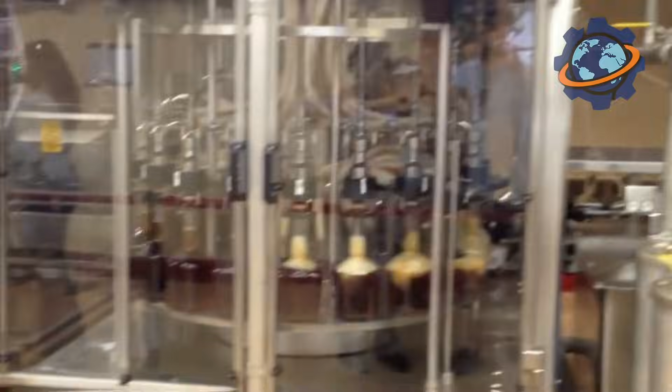In the heart of Kentucky, amidst the smoke, corn, and oak barrels, Maker's Mark has been brewing its potent magic since 1953. 34 million bottles a year, made with respect for the recipe, family, fire, and time. They don't just pour whiskey here, they forge character in every drop, with corn, wheat, smoke, and fire. But how did it all begin 72 years ago? Or perhaps even earlier?

The story of Maker's Mark is about a family that didn't compromise. About how one man and one woman decided enough of making bourbon that just burns in your throat. It's time to make something that has taste, smoothness, and a legend you can't mistake for anything else.

It all started even before Maker's Mark, with the Samuels family, who had been making whiskey since the 1780s. It was a true bourbon dynasty, generation after generation, barrels, recipes, pot stills. But the bourbon they made was like most at the time, strong, woody, harsh, with the aftertaste of a smoky punch. Then, Bill Samuels Sr. came onto the scene, a man with character.

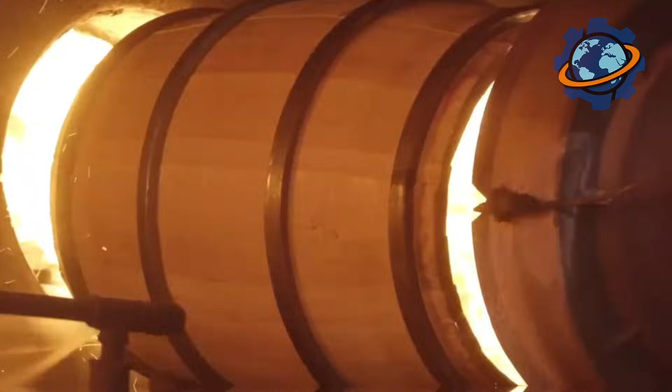In 1953, tired of traditions and the constraints of the old recipe, he took all his whiskey wisdom, acquired over generations, and burned it to hell in a furnace. Yes, he literally burned the old bourbon recipe to start with a clean slate. He needed something new, something different from the competitors. Without the harsh aftertaste of rye, without the sharp finish that hits you in the throat.

And then an idea came. Replace the rye with soft red winter wheat. Less aggression, more roundness, body, warmth. It was revolutionary. While Bill experimented with the grain, Margie Samuels, his wife, held in her hands everything we now recognize as Maker's Mark. She came up with the name. Maker, one who creates. Mark, the craftsman's seal.

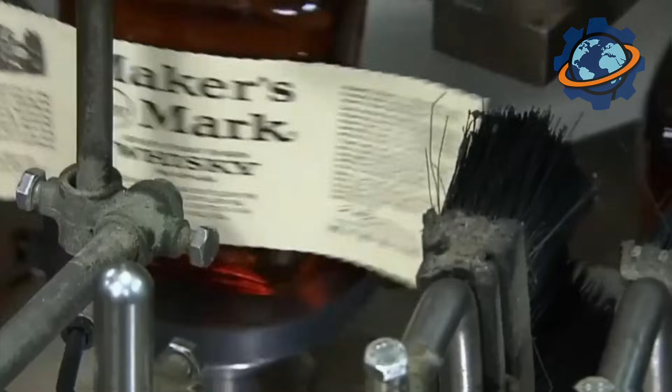She designed the signature label, which she wrote by hand, and decided it should be torn, as if from a workshop. And most importantly, she came up with that very red wax into which the neck of every bottle is dipped by hand. Red, hot, like a sealed kiss. She was a brand architect, marketer, and designer all in one bottle, long before those words became trendy. And Maker's Mark wouldn't be what it is without her.

The distillery was opened in Loretto, Kentucky, where the water is soft and limestone filtered, perfect for bourbon. There, a red watermill still stands as a symbol of moving forward. The bourbon is aged in charred American oak barrels, as it should be, and is not chill filtered to not lose its flavor. The bottles are filled, hand-dipped in red wax, and each one is slightly different. Like a fingerprint.

Maker's Mark wasn't in a hurry to go mainstream. They didn't run TV commercials. They didn't drop the price. They just made bourbon that people wanted to share with a friend. And so, from a small brand on a farm, Maker's Mark grew to 34 million bottles a year. And to this day, at the distillery, you can see that old recipe, not in a book, but in ashes. Bill Samuels destroyed the past to create a bourbon that isn't afraid of the future.

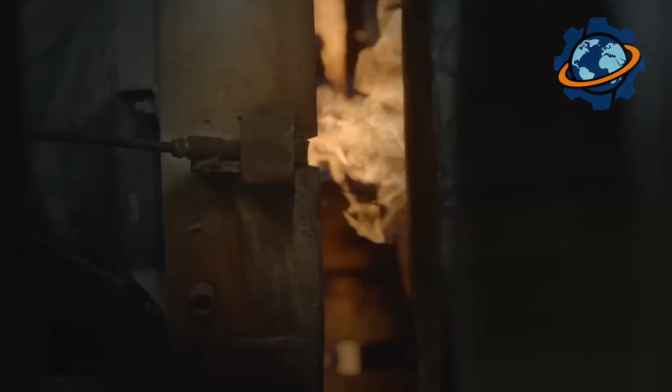If you've ever held a bottle of Maker's Mark in your hands, heavy, with red wax, rough lettering, and a light aroma of smoke, you've touched the very thing that goes through months of fire, fermentation, and wood. This bourbon isn't made on the fly, and is not poured into millions of bottles from a single tank. This is manual labor and old rules. Let's break it down one by one.

The basis of any bourbon is grain. At Maker's Mark, it all starts with the right mix. 70% corn, which gives the body sweetness and weight. 16% soft red winter wheat. Unlike rye, it makes the profile smooth, without a harsh kick to the back of the throat, and 14% malted barley, which kicks off fermentation. No malt, no reaction, no whiskey, nothing to talk about.

All these grains come from American farms, with which Maker's has worked for years, for generations. Each batch is accepted not on faith, but through the laboratory and the nose. Moisture, size, smell. Everything is recorded. There's no "it'll do" here. Everything is under control, as on a shooting range. The grain arrives. It's ground in steel mills to a coarse, hard meal.

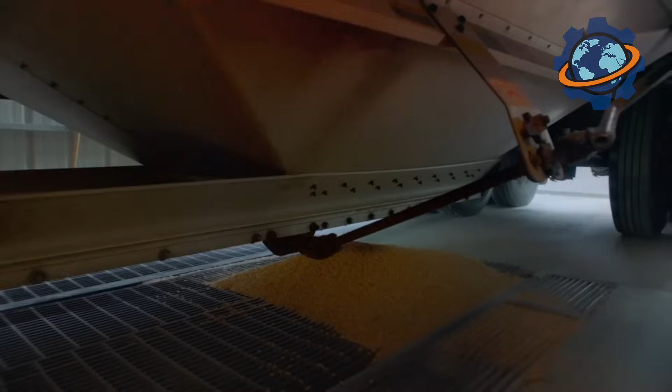Nothing like flour. This is a fighter's mash, ready for the fire. The ground grain is thrown into giant copper tanks. Soft limestone water from the depths of Kentucky is added, and the temperature is raised to 212 degrees Fahrenheit. All this steams, foams, breathes heavily. The mash is born. Starch begins to break down into sugars, which will later become the basis of alcohol.

The air smells heavy, malty, with a hint of hot corn. The heat comes from within, like from a forge. When the mixture cools to the right level, it's pumped into fermentation tanks, and here begins a process that isn't visible from the outside. At Maker's Mark, they use the same yeast that the Samuels family had been keeping since the 1950s. They haven't changed the culture or the method.

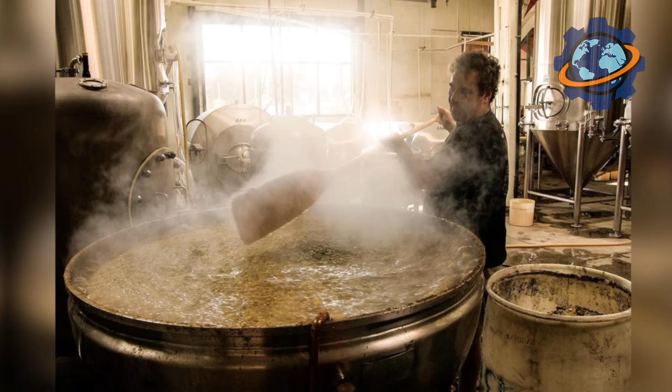Fermentation lasts for several days in oak tanks. It's the oak that provides the microflora, breathes, and works together with the whiskey. Microorganisms chew up the sugar, exhaling alcohol and heat. Everything boils, bubbles, and smells so that your head spins. Ripe bananas, yeasty bread, a little acidity, a little hoppiness. This isn't just fermentation. It's a deep force that carries the mash forward.

Then comes distillation. What separates the truth from the excess? Instead of trendy steel systems, good old copper pot stills, in which the spirit of the whiskey is cut through 2 distillations. The first distillation is rough, cloudy. The low wine has 25% alcohol. The second is clean, shiny. The high wine with a strength of over 130 proof. Here the future bourbon is born.

Rich, oily, powerful. The copper removes sulfur, adds nobility to the body. Not cold, but alive. The whiskey at this stage already has a scent. Not of alcohol, but of what will become a drink. Wood, toasted bread, warmth. The distilled bourbon is still hot, still a bit of a hooligan. It's poured into freshly charred American oak barrels, each one made by hand from white oak. No glued panels, all from solid staves, dried for years in the open air.

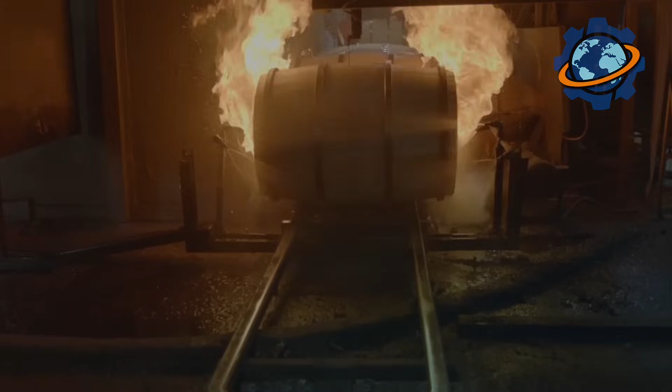Then, fire. The inside of the barrel is burned with flames, not for beauty, but so the inner layers of the wood give the whiskey caramel, vanilla, and that same woody backbone for which it is recognized even blindfolded. Bourbon is poured into the barrel, golden, fragrant, strong, and the long aging begins. How many years? It's not counted in years here, it's counted by taste. On average, 6 to 7 years, but no batch is released until the master says, "This is it."

All this time, the barrel stands in a warehouse where the heat in summer reaches 110 degrees Fahrenheit, and in winter, it can drop to 20. The wood expands and contracts, breathes, presses on the whiskey. Part of the liquid evaporates. The angels share, they say. Up to 10% disappears each year, seeping into the ceiling. But what remains becomes stronger, more complex, deeper. Here the smell of leather, caramel, dampness, and honey appears. The bourbon absorbs everything it needs from the wood, and nothing extra.

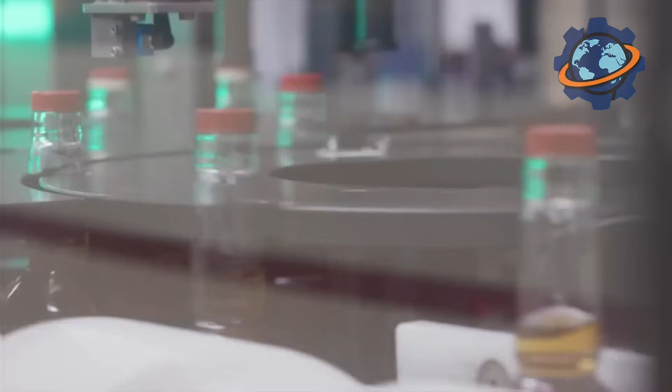And then, the red wax. What you see from afar. What no one imitates. At Maker's Mark, they still dip each bottle by hand into hot red wax. The bottle goes in neck first to the middle, is lifted out, and the wax slowly drips down, leaving a thick, characteristic drop, like a seal. No two are alike. Each one is uniquely wild. And then, and only then, the bourbon goes into boxes, which are sent to bars, stores, and to people who appreciate not just alcohol, but work into which time, tradition, and character have been invested.

The guys in work clothes, with calloused hands, glance at the steam clouds. Everything is going as it should. One pours the yeast, another checks the temperature in the fermenter. In the cooperage, a dry pop explodes. Another oak barrel has been charred inside. Nearby, a woman, focused and calm, dips bottles into hot wax. Her movement is precise. Not a single extra drip.

For lunch, meat with bread, coffee from a thermos, and a short laugh. Did you see how Jim mixed up the barrels yesterday? Then again, barrels, spirit, wood, red wax, and so on, day after day. They don't rush. They're making bourbon.

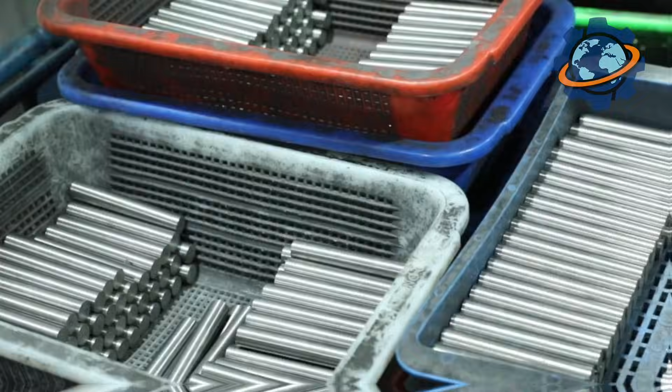Hold a 1-inch tungsten cube. It weighs nearly 1 pound, denser than gold, heavier than lead. Drop it and the floor dents, not the cube. This metal refuses to melt until 6,192 degrees, hotter than Earth's core, beyond temperatures where other metals vaporize.

Light bulb filaments, armor-piercing bullets, rocket nozzles. Tungsten survives conditions that destroy everything else. Yet it starts as dull gray rock, looking worthless. How does brittle ore transform into metal that won't surrender? Why does one nation control 70% of global supply?

Stay with us. You'll witness industrial-scale mining reshaping mountains and discover tungsten's shocking secret. This indestructible metal is so brittle in pure form it shatters like glass.

The Dayu tungsten mine in Jiangxi, China dominates the landscape. An open pit 3 miles across descending 800 feet into earth. Giant haul trucks, each carrying 400 tons, crawl spiral roads looking like toys from the rim's edge.

This single mine produces 40,000 tons of tungsten concentrate annually, enough to manufacture 2 billion light bulbs. 70% of the world's tungsten comes from Chinese operations like this.

Watch the blast sequence. Drillers bore holes 50 feet deep in geometric patterns across the pit floor. Each hole gets packed with explosives, 200 pounds per hole, hundreds of holes per blast. The detonation ripples across the face in sequence, fracturing 10,000 tons of rock in 30 seconds.

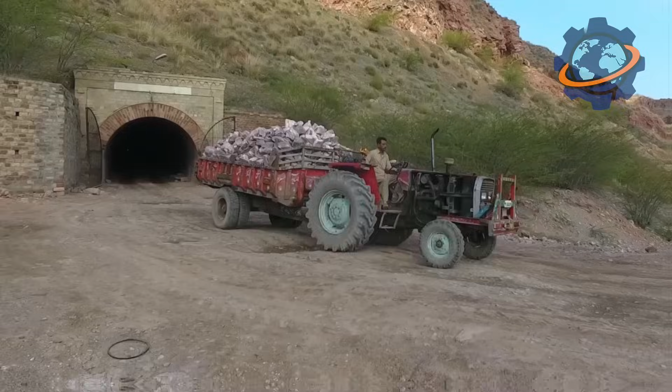Dust clouds billow 300 feet high, visible from orbit. What took nature millions of years to create, humans demolish in half a minute. The ore, wolframite and scheelite, contains just 0.5% tungsten. That means 99.5% is waste requiring removal.

Massive crushers reduce boulders to gravel. Ball mills grind further. Rotating drums containing steel balls pulverize ore to powder finer than flour. The grinding noise is deafening, continuous thunder as metal crushes rock.

Separation uses gravity and magnetism. Wolframite, being dense and magnetic, concentrates easily. Scheelite requires froth flotation. Chemicals make tungsten minerals hydrophobic, clinging to bubbles while waste sinks. The concentrate, now 15% tungsten, ships to processing plants.

China's dominance isn't accidental. They control reserves, processing knowledge, and critically tolerate environmental damage Western nations won't accept. Tailings ponds stretch miles, filled with chemical-laced sludge that'll remain toxic for centuries.

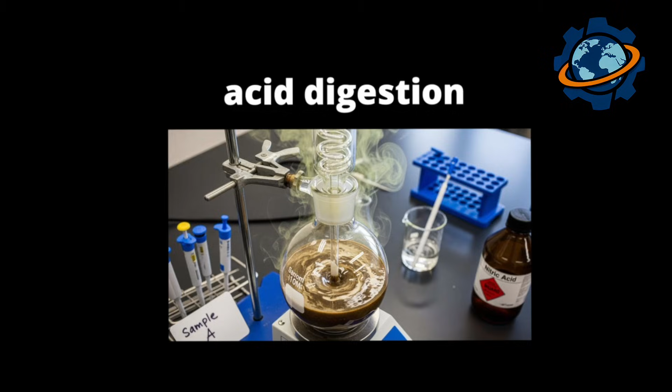Processing concentrate into pure tungsten trioxide requires acid digestion. The concentrate gets dissolved in hydrochloric or nitric acid, a violent chemical attack breaking molecular bonds. Tungsten dissolves while impurities precipitate out. The solution, now containing tungsten compounds, undergoes pH adjustment, causing yellow tungsten trioxide powder to crystallize.

This powder undergoes hydrogen reduction, the crucial transformation. Inside tube furnaces heated to 1,800 degrees, hydrogen gas flows over tungsten trioxide. The hydrogen strips oxygen atoms, leaving metallic tungsten powder.

But here's the challenge. Pure tungsten powder is useless. The particles don't bond. Press them together and they crumble. Tungsten's ultra-high melting point makes conventional melting impossible. No crucible survives the temperatures required. The solution? Powder metallurgy.

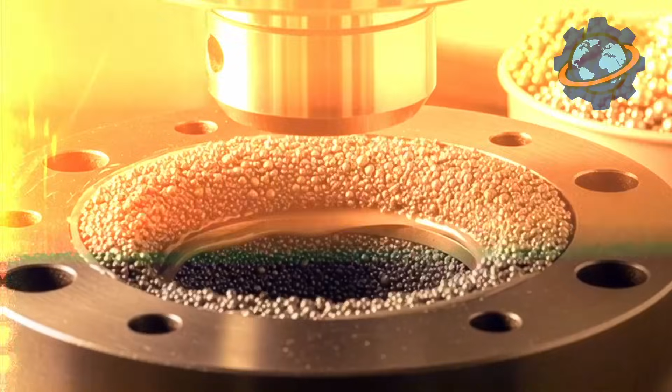Powder metallurgy bypasses melting through sintering. Particles fuse below melting point under pressure and heat. Tungsten powder gets pressed into desired shapes using hydraulic presses generating 50,000 psi. The compacts, called green bodies, are fragile. Handle roughly, and they disintegrate.

The green bodies enter sintering furnaces operating at 4,500 degrees in a hydrogen atmosphere. At these temperatures, tungsten atoms migrate across particle surfaces, welding together without liquefying. The process takes 12 hours. What emerges has transformed. The powder compact becomes solid metal with 99% density.

Dimensional changes are predictable but significant. Parts shrink 18% during sintering. Engineers must design oversized greens compensating for this shrinkage.

Pure tungsten remains problematic. It's brittle at room temperature, difficult to machine. The solution? Alloying. Adding 2% thorium or lanthanum dramatically improves workability. These elements prevent grain growth during sintering, creating a fine-grained structure that machines more easily.

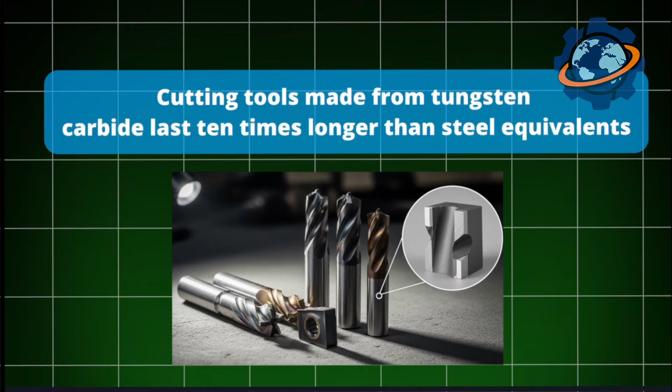The most common tungsten product worldwide is tungsten carbide, tungsten powder mixed with carbon, sintered together. Tungsten carbide achieves hardness second only to diamond. Cutting tools made from tungsten carbide last 10 times longer than steel equivalents. Mining drill bits, machining inserts, industrial dies. Anywhere extreme wear occurs, tungsten carbide dominates.

The material cuts steel like butter but shatters under impact. Drop a tungsten carbide block on concrete and it explodes into fragments. The combination of extreme hardness and extreme brittleness defines tungsten's paradox.

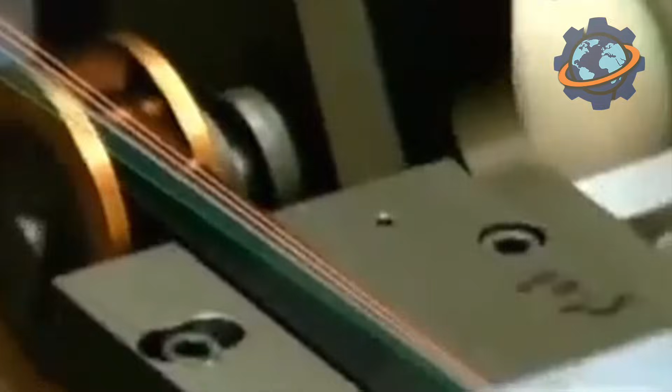Wire drawing demonstrates tungsten's remarkable properties. The sintered tungsten gets heated to 3,000 degrees and drawn through progressively smaller diamond dies. The wire diameter reduces from 1/4 inch to thousandths of an inch, thinner than human hair, for light bulb filaments. This drawing process work hardens tungsten, increasing strength.

Modern LED lights made tungsten obsolete for household illumination, but specialty applications remain. Electron microscopes, X-ray tubes, high-temperature furnace elements. Anywhere electricity must flow through extreme heat, tungsten wire delivers.

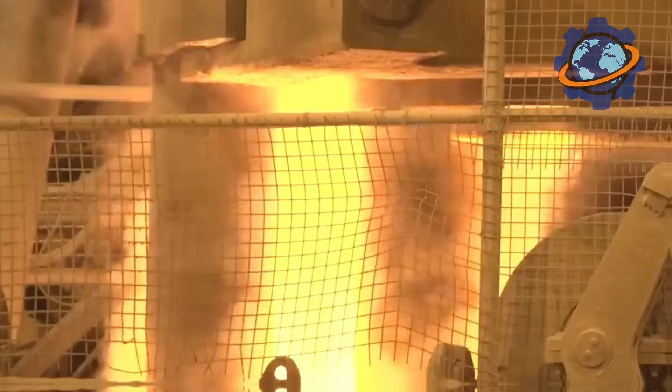Military applications drive demand relentlessly. Tungsten's density, 19.3 grams per cubic centimeter, nearly identical to gold, makes it ideal for kinetic penetrators. Armor-piercing ammunition uses tungsten or tungsten alloy cores. Fired from tank cannons at 5,000 feet per second, these projectiles punch through steel armor through sheer mass and velocity, not explosive force.

The ethical controversy is intense. Depleted uranium performs similarly but raises radioactivity concerns. Tungsten offers equivalent performance without radiation, but mining's environmental cost is staggering. Each ton of tungsten requires processing 200 tons of ore, generating mountains of toxic waste. The metal that survives Earth's most extreme conditions is extracted through processes poisoning the planet.

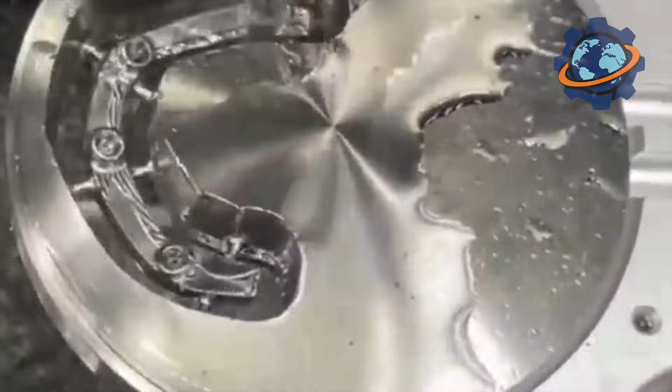Swedish chemist Carl Scheele identified tungsten oxide in 1781, studying the mineral scheelite. Spanish brothers Juan and Fausto Elhuyar isolated metallic tungsten 2 years later. The name derives from Swedish tungsten, heavy stone. For a century, tungsten remained a laboratory curiosity. Everything changed when Thomas Edison needed light bulb filaments in 1879. He initially used carbon, which burned out quickly. By 1904, manufacturers switched to tungsten, revolutionizing electric lighting.

World War I revealed tungsten's military value. High-speed steel cutting tools containing tungsten enabled mass production of weapons. Today's annual production exceeds 90,000 tons, with China dominating supply chains so completely that Western nations consider tungsten a strategic vulnerability. Carbon emissions remain problematic as tungsten production generates 8 tons of CO2 per ton of metal, primarily from energy-intensive processing. Recycling exists but remains limited. Only 30% of tungsten gets recycled, far below rates for aluminum or steel.

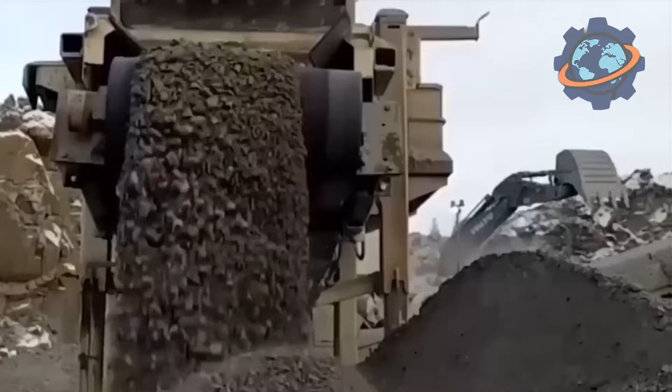Here's the secret we promised. Tungsten's incredible strength comes from its weakness. Pure tungsten is brittle, shattering easily. But that brittleness stems from its crystal structure. Atoms packed so tightly that dislocation movement, the mechanism allowing metals to deform, essentially stops. This atomic rigidity creates the highest melting point, extreme hardness, and resistance to deformation. The metal survives temperatures melting steel because its atoms simply refuse to move. Adding trace elements creates enough flexibility for workability while maintaining strength.

From Chinese mountains to cutting edges worldwide, the transformation completes. We've mastered metal that defies conventional metallurgy, processing it through techniques developed when melting proved impossible. That drill bit cutting through rock, that filament glowing white hot, that bullet piercing armor, all share tungsten's fundamental contradiction. The strongest metal is also the most fragile. The element that won't melt is useless without powder metallurgy. We've learned to work with nature's extremes by accepting, not fighting, inherent limitations. Tungsten doesn't compromise. Neither do the engineers who've learned to shape it.

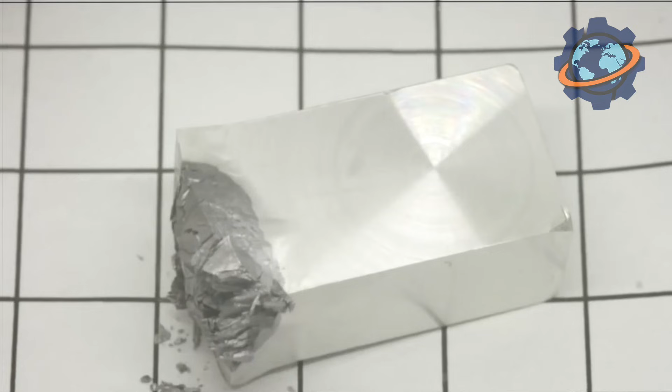Every year, over 40 million new gadgets hit the market, but almost nobody knows about the metal that makes them actually work. Why can a tiny element buried deep underground literally launch an entire civilization, from the Bronze Age to modern electronics? And what do ancient swords, tin cans, and your smartphone have in common? In this video, we're uncovering the secret of tin, the metal that built the past, runs the present, and hides a fact you've definitely never heard before. Stick around until the end. That's where the real mystery reveals itself.

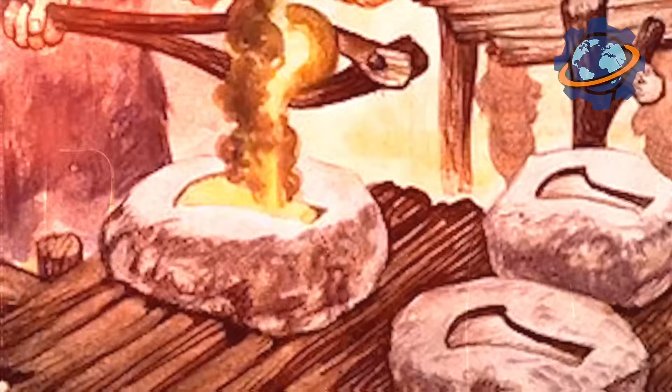Tin isn't just some new trend. This is a metal with a deep-rooted history spanning thousands of years. Its discovery sparked a genuine revolution that forever transformed the course of human civilization, launching what we call the Bronze Age. Picture this. Ancient craftsmen learned to extract copper and forge tools from it. But copper was soft. Then, whether by accident or experimentation, they discovered something remarkable. If you added a little bit of another then unknown metal to molten copper, the alloy became incredibly strong, hard, easier to cast, and held a sharper edge.

That metal was tin. The copper-tin alloy became known as bronze. Bronze swords, shields, tools, jewelry, all of this suddenly became accessible, giving ancient civilizations a massive advantage. It was a true technological leap that transformed warfare, agriculture, and art. Tin became so valuable that real battles were fought over its deposits, and trade routes to tin mines, like those in Cornwall, Britain, were incredibly important.

Over the centuries, tin stayed valuable. It was used as a coating for other metals to protect them from corrosion. For example, tin plate, a thin sheet of steel coated with tin, which was used to make cans. It was also used to make soft solders that joined metals together, and in the production of mirrors, and even to create organ pipes and coins. But its true renaissance came in the 20th century with the rise of electronics. Over 50% of all global tin consumption goes to this industry.

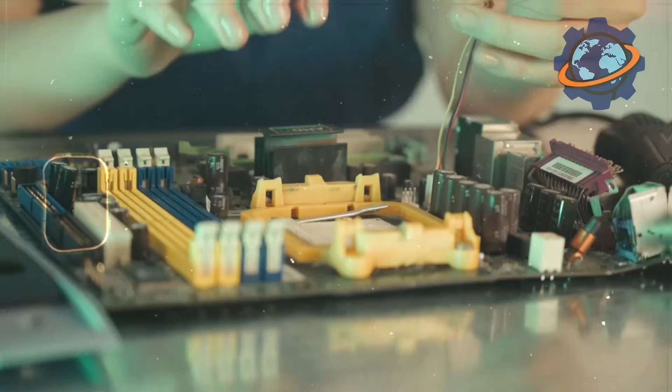Solder. That's its main job. Your computer, smartphone, TV, inside them, thousands of electrical components are connected together. These connections are made using solder, which is usually an alloy of tin with other metals, like lead in the past, now mostly with copper, silver, or nickel. Tin is perfect for solder because it has a relatively low melting point, which makes it easy to melt and form connections without damaging sensitive electronic components.

Tin also wets metals, meaning it easily flows across the surface, creating a strong electrical and mechanical bond. It's got great electrical conductivity too, and it's corrosion resistant. Modern electronics use what's called lead-free solder, which is a huge step forward for the environment. Tin is the main component in these alloys. Without reliable soldered connections, the entire complex architecture of microchips would simply fall apart, and your gadget would turn into a pile of useless parts.

Tin is used to coat other metals, especially copper, on printed circuit boards. This protects the copper traces from oxidation and makes the soldering process easier. It's also used to coat connectors, which improves their electrical conductivity and corrosion resistance.

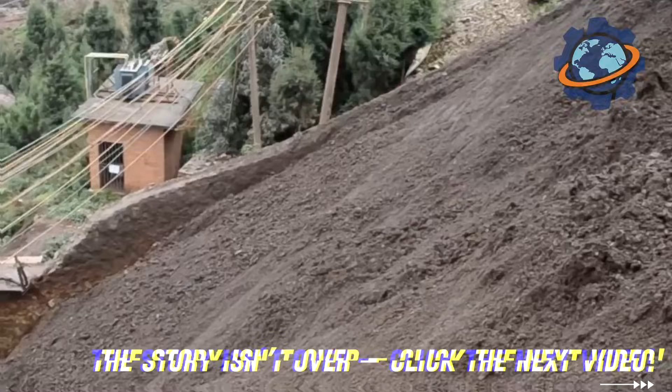Tin isn't a super common element in the Earth's crust. Its primary mineral is cassiterite, basically tin oxide. It's a pretty dense mineral that's often found in placer deposits, meaning you can extract it from river sediments or ancient coastlines. Over 70% of the world's tin production is concentrated in 4 countries across Southeast Asia and South America: China, Indonesia, Myanmar, and Peru. This makes the tin market highly sensitive to political and economic events in these regions.

Tin mining begins with the exploration phase. Geologists, armed with modern technology, conduct surveys, drilling, and analysis of soil and rock samples to find locations where cassiterite concentrations are high enough for economically viable extraction. Once a deposit is identified, development begins, which can follow two main paths depending on the type of deposit.

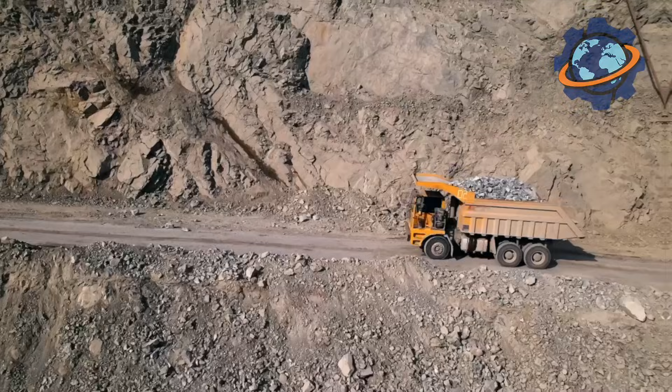The first and most common method of tin mining is from placer deposits. Picture this. Over millions of years, cassiterite washed from bedrock by water and erosion accumulated in riverbeds, at the bottom of lakes, or on ancient seashores. It settled like sand in what's called placer deposits. Extracting from these deposits is often way simpler than digging underground mines.

Here, they use massive dredges, floating factories that scoop up tons of soil and gravel from the bottom of waterways, or they deploy hydraulic monitors, powerful jets of water under high pressure that blast away soil from riverbanks or hillsides containing cassiterite. The blasted rock then flows to primary processing, where gravity methods, exploiting density differences, separate the cassiterite from lighter waste rock. Think industrial-scale gold panning, only gigantic.

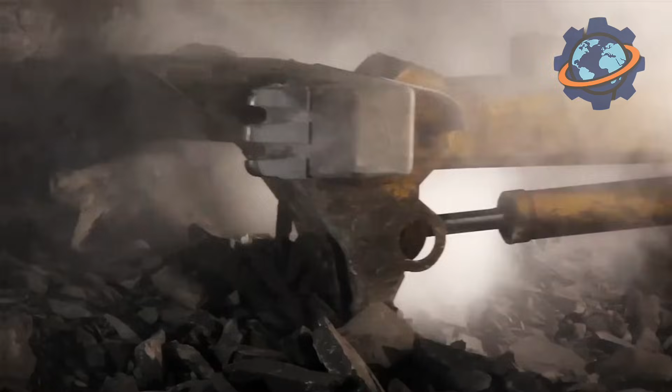The second method? Extracting from primary deposits, where cassiterite sits directly in solid rock. That's where traditional underground mines come in, same as mining any other metal. Miners drill tunnels and boreholes into the rock, use explosives to blast apart the ore vein, then loaders collect the ore and haul it to the surface. It's a more expensive and complex operation, requiring heavy-duty equipment and strict safety protocols.

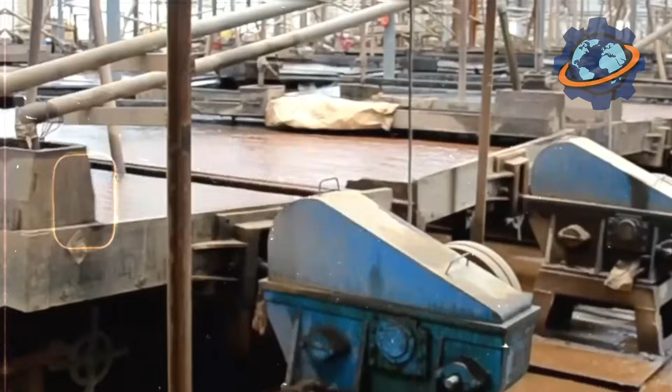Once extracted, the ore, no matter where it came from, heads to a processing plant. First, it's crushed and ground into a very fine powder in mills to free the cassiterite crystals from the surrounding rock. Then various enrichment methods kick in. The first method, gravity separation. Since cassiterite is a pretty dense mineral, it gets separated from lighter minerals using water. This can happen in jigs, concentration tables, or spiral separators.

The second method is flotation. Sometimes, for further enrichment or to separate cassiterite from other minerals, flotation is used, where cassiterite selectively sticks to air bubbles and rises to the surface as foam. As a result of all these processes, a tin concentrate is obtained that already contains more than 50% cassiterite, or even more. This concentrate then goes to a metallurgical plant to produce pure metallic tin.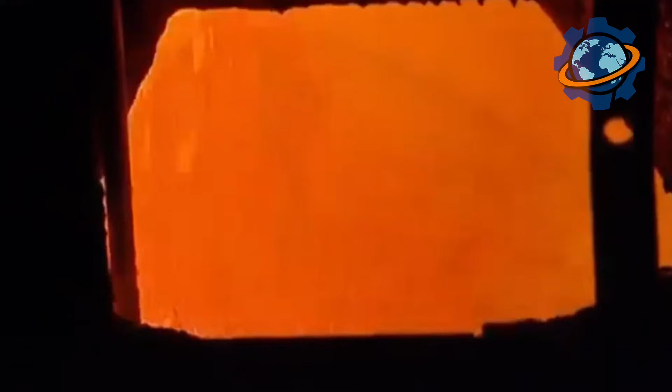Here, the concentrate, which is tin oxide, is mixed with coal, which acts as a reducing agent, and fluxes. Fluxes are substances that help separate impurities. This mixture is heated in special furnaces to high temperatures, typically around 2400 degrees Fahrenheit. At these temperatures, the carbon steals the oxygen from the tin oxide, releasing pure metallic tin, which melts and flows to the bottom of the furnace.

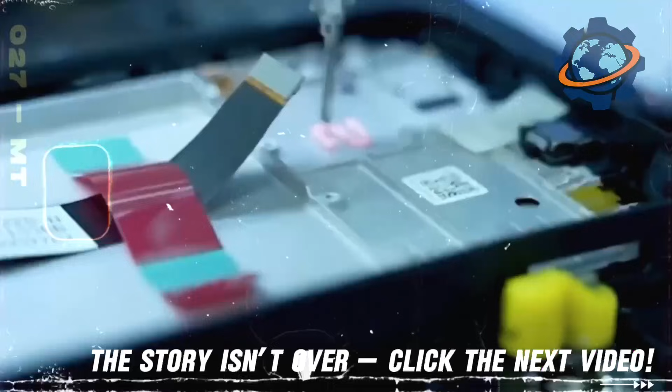The molten crude tin still contains impurities from other metals, so it goes through another crucial stage, refining. This can be thermopurification, where the tin is heated to specific temperatures so other metals separate out or float to the surface. Or more often, electrolytic refining, which allows for extremely high tin purity. High purity means almost 100% in this case. Can you believe that? This is critically important, especially for the electronics industry, where even the tiniest impurities can affect conductivity and component reliability.

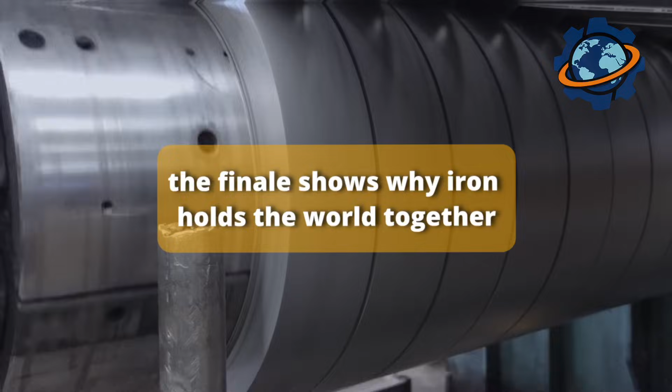How do fiery rivers of molten metal at 3,600 degrees emerge from red ore in city-sized quarries? You'll see explosions in quarries, blast furnaces as tall as 30-story buildings, converters where oxygen turns pig iron into steel in minutes, and rolling mills where 1,000-ton slabs get rolled into paper-thin sheets. Watch to the end. The finale shows why iron holds the world together. This is the story of the metal that built civilization.

The Lebedinsky Quarry in Russia is one of the planet's largest iron ore quarries. Depth, nearly 2,000 feet. Width, 3 miles. From the edge, you can't see the bottom. A gigantic wound in the earth from which 100,000 tons of iron ore are extracted daily. Excavators as tall as 10-story buildings scoop rock with buckets holding 1,800 cubic feet. One bucket is like a small house. Dump trucks with 360-ton capacity haul ore up the spiral road. Wheels taller than a person.

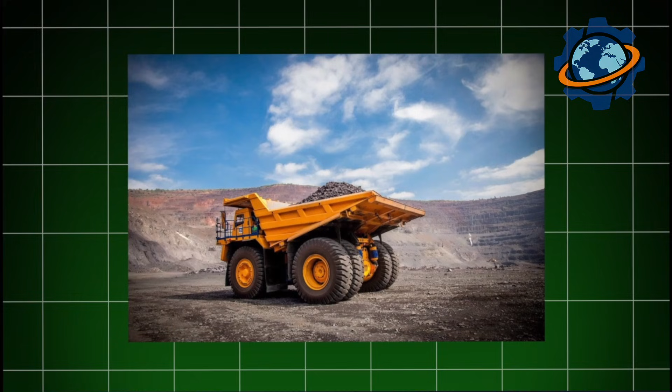But before loading the ore, it needs to be blasted. Drilling rigs create holes 65 feet deep. Tons of ammonium nitrate explosive are packed into these holes. The explosion? Earth trembles. A wall of rock tall as a skyscraper crashes down. A dust cloud rises 3,000 feet. After the dust settles, excavators begin work. The ore is reddish-brown, sometimes almost black. Magnetite and hematite, iron oxides. Iron content ranges from 30 to 60%. The rest is waste rock.

The ore goes to a processing plant. Massive cone crushers grind bus-sized chunks. The noise can be heard for miles. Ore gets crushed to fist size, then to gravel, then smaller. It enters ball mills, steel drums 20 feet in diameter, 33 feet long. Inside are hundreds of tons of steel balls. The drum rotates, balls drop, grinding ore into fine powder. After 8 hours of grinding, you get reddish-brown dust. It's mixed with water, creating pulp, liquid slurry.

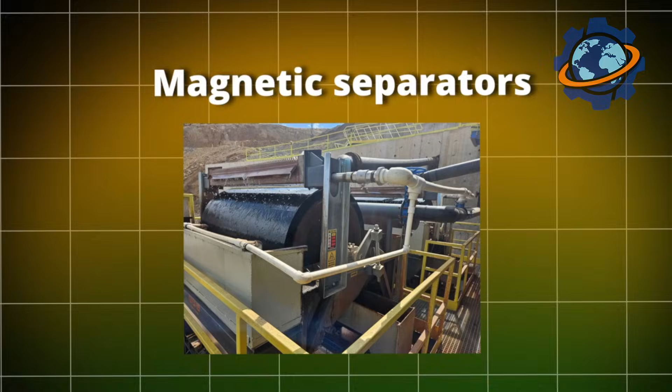This slurry passes through magnetic separators. Magnetite sticks to magnetic drums. Waste rock washes away. The concentrate contains 65 to 70% iron. From this, they make pellets, granules the size of walnuts. Wet concentrate gets rolled into balls on special drums, then fired at 2,400 degrees Fahrenheit. Pellets harden, becoming rock solid. These pellets are raw material for blast furnaces. Each plant produces millions of tons of pellets yearly. They're loaded onto trains and shipped to steel mills.

A blast furnace is a steel tower 330 feet tall, 46 feet in diameter. 30 stories of pure metal and fire. Lined inside with 3-foot-thick fireproof brick. Internal volume, 176,000 cubic feet. Iron ore pellets, coke, and fluxes like limestone or dolomite are loaded from the top, in layers, like a layered cake, several hundred tons at a time. From below, through tuyères, openings in the walls, hot air is blown in. Air temperature, 2,200 degrees Fahrenheit. Pressure, 4 atmospheres. Coke ignites. Temperature in the furnace's lower section reaches 3,600 degrees Fahrenheit.

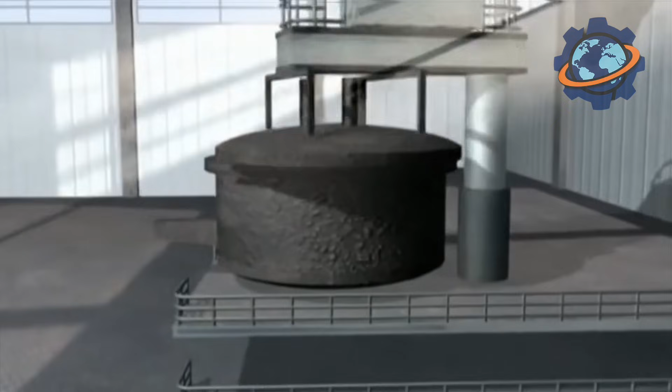Pellets slowly descend, heating up. Different reactions occur at different heights. First, moisture leaves the ore. Then, at 930 degrees, iron oxide reduction begins. Carbon from coke strips away oxygen. At 1,800 degrees, ore becomes spongy iron. At 2,700 degrees, iron melts. Drops of molten metal flow down. At the furnace bottom, molten pig iron accumulates, an iron alloy with 4% carbon. Pig iron temperature at the furnace bottom is 2,700 degrees Fahrenheit. It glows blindingly white with an orange tint. Pig iron is denser than slag, so it stays at the bottom. Slag, molten impurities and fluxes, floats on top.

Every 4 hours, they open the tap hole, an opening in the furnace's sidewall. Pig iron tapping is a fire show. A stream of molten metal flows down channels. Sparks fly dozens of feet. The brightness requires dark glasses to watch. Pig iron flows into massive ladles on railroad cars. One ladle holds 300 tons. It's a locomotive made of molten metal. The ladle gets covered to prevent cooling and shipped to the steelmaking shop. One blast furnace operates continuously for years. Stopping is catastrophic. Metal would solidify inside. The furnace produces 10,000 tons of pig iron daily. That's like 100 railroad cars.

Major steel mills have 10 to 15 blast furnaces. But pig iron isn't steel yet. It's brittle due to high carbon content. Steel is needed, an alloy with less than 2% carbon.

Pig iron gets poured into a converter, a massive pear-shaped vessel 33 feet tall, lined with fireproof brick. It holds 350 tons of molten metal. The converter tilts, pig iron pours in, steel scrap is added for cooling. The converter returns to vertical position. An oxygen lance, a tube 20 inches in diameter, lowers from above.

Oxygen flow begins. A jet of pure oxygen at 150 pounds per square inch pressure strikes the molten metal. Violent reaction begins. Oxygen oxidizes carbon, silicon, manganese, impurities in pig iron. These exothermic reactions release enormous heat. Temperature rockets to 3,200 degrees Fahrenheit.

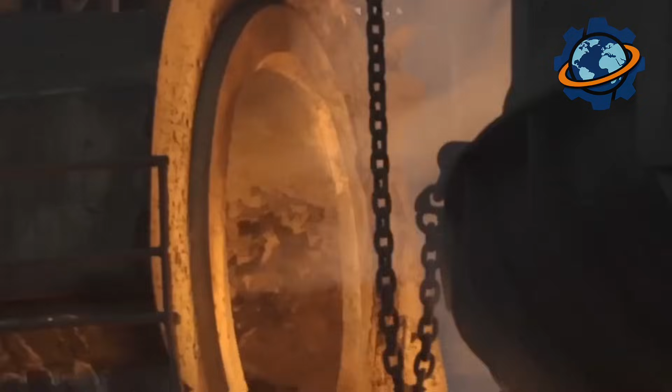Metal boils and churns. Flame tongues several feet high shoot from the converter mouth. Sparks and molten drops fly everywhere. The blowing process takes 20 minutes. In this time, 350 tons of pig iron become steel. Carbon burns down to 1% or less.

The converter tilts, steel pours into a ladle. The molten metal glows blindingly white at 2,900 degrees Fahrenheit. Alloying elements get added to the ladle: manganese, chromium, nickel, molybdenum, depending on the steel grade needed. They mix it by blowing argon through. Then steel gets cast. There are two methods.

First, continuous casting. Molten metal pours into a crystallizer, a water-cooled copper mold. Below, a solidifying blank emerges, a slab 8 inches thick, 6.5 feet wide. It glows red, surface temperature around 1,800 degrees Fahrenheit. Gas cutters slice the slab into 33-foot lengths. One slab weighs 25 tons.

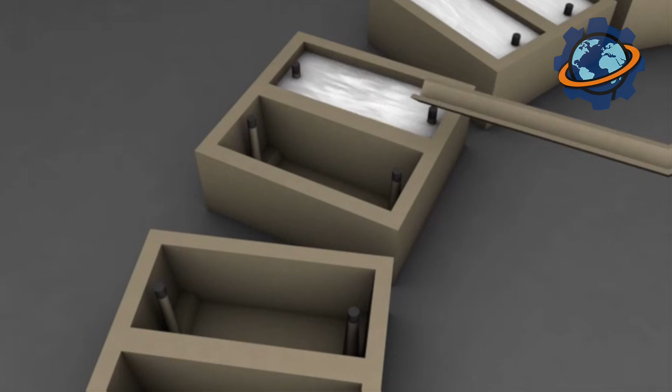Second method, casting into ingot molds. Steel forms. This creates ingots up to 50 tons. These ingots and slabs are semi-finished products. They go to rolling mills. There begins the final transformation, turning thick blanks into thin sheets, rails, or beams.

Slabs heat in reheating furnaces to 2,200 degrees Fahrenheit, red hot. Then they go to the rolling mill. It's a line of dozens of rolls. Steel cylinders 3 feet in diameter weighing dozens of tons. Rolls rotate toward each other. The red-hot slab enters between rolls. They squeeze and roll it. The slab gets thinner and longer.

It passes through the next pair of rolls, even thinner, dozens of times. An 8-inch thick slab becomes a sheet 1 to 2 millimeters thick. Length grows from 33 feet to over half a mile. Rolling speed on finishing mills reaches 50 miles per hour. Red-hot steel ribbon flies through the mill, sparks flying everywhere.

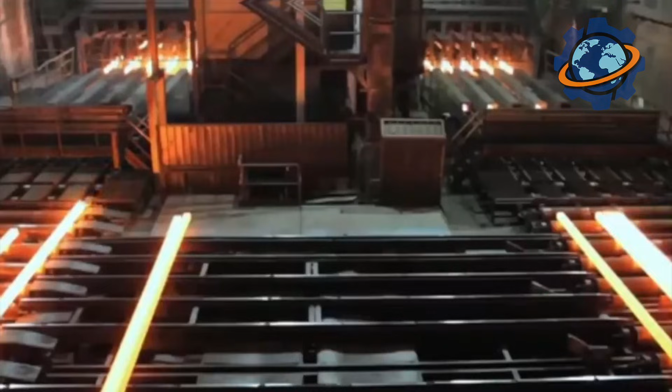Temperature drops to 1,400 degrees Fahrenheit, metal darkens. The strip cools with water, winds into giant coils weighing 20 to 30 tons. This is hot-rolled steel, the foundation for car bodies, appliance housings, building structures.

Global steel production is 2 billion tons yearly. China produces over 1 billion tons, half the world's output. India, Japan, the US, Russia are other major producers. Steel is infrastructure's backbone. 95% of metal structures are steel, from skyscrapers to tin cans, from tankers to paper clips. Iron and steel are civilization's skeleton.

Iron is the oldest metal after copper and bronze. The Iron Age began 3,000 years ago. First, iron came from meteorites, ready-made metal fallen from the sky. Egyptian pharaoh Tutankhamun was buried with a meteorite iron dagger. Smelting iron from ore was learned by Hittites in Asia Minor around 1200 BC. They kept the secret for centuries, but technology spread.

Iron weapons were stronger than bronze. Iron plows worked soil better than wooden ones. Civilizations with iron defeated civilizations without iron. Medieval times, iron was made in small furnaces. The Industrial Revolution began with blast furnace invention in the 18th century. Early furnaces used charcoal. Later, they switched to coke from coal.

The 19th century brought the converter process, rapid pig iron to steel conversion. Bessemer, Martin, Thomas, names that changed the world. The 20th century was steel century. Skyscrapers, bridges, ships, automobiles. Without steel, there'd be no modern world.

And so, traveling from explosions and 2,000-foot-deep quarries through giant crushers and magnetic separators, through 300-foot-tall blast furnaces at 3,600 degrees and converters where oxygen burns out carbon in 20 minutes, through rolling mills where 8-inch slabs become millimeter-thin sheets, steel emerges, the metal that built civilization.

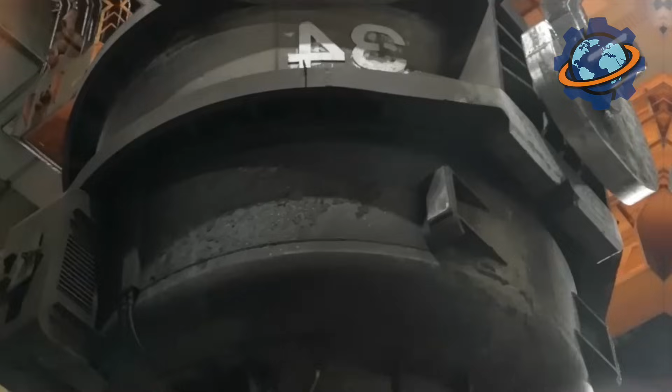And on the surface, iron rules. 95% of all metal is iron and steel. From nails to bridges, from paper clips to skyscrapers, iron holds the world together. Without iron, humanity would collapse back to the Stone Age. No machines, no electricity, no internet.

Everything's built on iron. From fiery rivers of molten pig iron in blast furnaces to steel beams holding up skyscrapers, iron is the foundation, the base, civilization's skeleton. Metal of the gods that became metal of the masses. The most abundant, most important, most irreplaceable. Iron, the metal that holds the planet together.

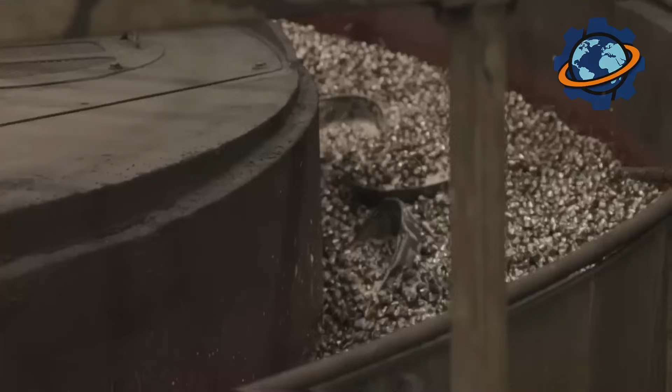Every year, the world melts over 1 billion tons of pig iron. But where does all that fiery metal come from? Imagine a giant furnace as tall as a 35-story skyscraper that never sleeps. Its guts glow like the Earth's core, and the temperature hits 3,600 degrees Fahrenheit. That's 2,000 Celsius. This is a blast furnace.

They don't just melt metal here. They give birth to the heart of industry. But there's a secret that only the guys standing at the tap hole know. If you stick around to the end, you'll find out what's really happening in the center of this burning fortress, and why it changes everything.

Imagine a colossal tower, taller than a 35-story skyscraper. The ground beneath your feet vibrates slightly from its relentless work, and the air is filled with a hum, like the breathing of a giant beast. At night, its top glows, pushing back the darkness. This is a blast furnace, a massive vertical smelter, where 24 hours a day, 7 days a week, the magic of turning ore into metal happens non-stop.

Why blast furnace? The name comes from the process itself, and it's no accident. The whole secret to a blast furnace is the constant blast of incredibly hot air that fuels the fire and kicks off all the necessary reactions. If you were to slice a blast furnace open, you'd see it looks like a stretched out bottle. Every part of it has a name and a purpose. The walls of the furnace are lined with special refractory bricks, capable of withstanding temperatures that would melt solid rock. This is a true fortress, built to tame fire itself.

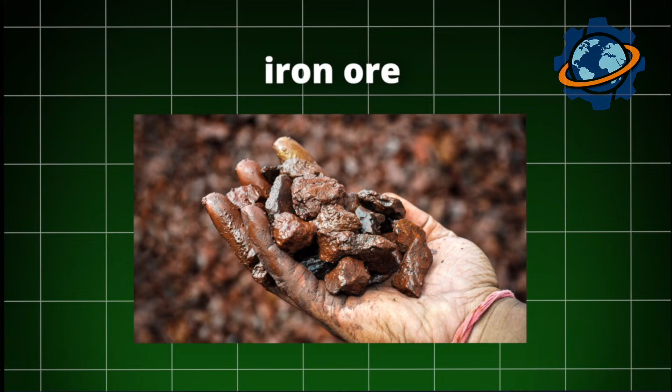The iron ore is the foundation of it all. They usually don't just use raw ore dug from the ground, but specially prepared sinter or pellets. These are baked clumps of fine ore, or rolled balls of ore concentrate. The main goal is to have as much iron oxide in the raw material as possible, from which the oxygen will later be ripped out.

Coke is coal that's been cooked in special ovens without access to air. After this treatment, it becomes strong, porous, and burns with an immense amount of heat. But that's not its only role. The carbon that makes up coke is the real magician that turns ore into metal. The flux is most often ordinary limestone. Why is it needed? The ore and coke always have useless impurities, so-called gangue. The limestone helps to bind these impurities, forming an easily meltable slag.

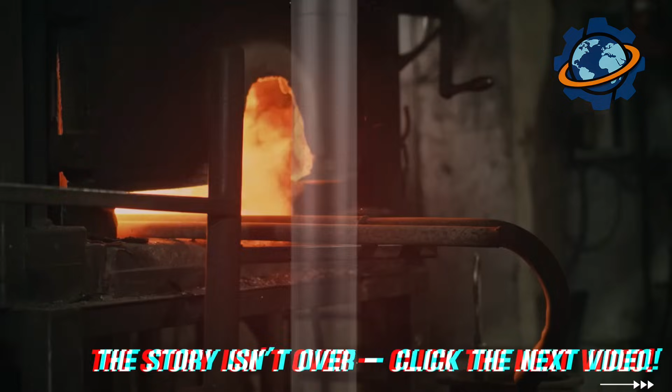So, the charge is loaded. What's next? This is where it gets interesting. Two streams move towards each other. From the top, the layers of the charge slowly descend, and from the bottom, a hurricane of superheated gases rushes up to meet them. It all starts at the bottom, in the hearth. Through special pipes called tuyères, air heated to a scorching 2,200 degrees Fahrenheit, 1,200 Celsius, is blasted into the furnace under huge pressure. That's hotter than volcanic lava.

Meeting the red-hot coke, the oxygen in the air instantly ignites. The temperature in this zone skyrockets to 3,600 degrees Fahrenheit, 2,000 Celsius. This creates carbon dioxide. But as it rises higher and passes through new layers of coke, it turns into another gas, carbon monoxide. And this gas is the real oxygen thief.

As this searing hot stream of gas rises up the furnace shaft, it envelops the chunks of ore and begins to greedily rip the oxygen from them, leaving behind reduced, spongy iron. The reduced iron continues its journey downward into hotter and hotter zones. It passes through the glowing layers of coke and, like a sponge, begins to soak up its carbon. And here's where something amazing happens.

Pure iron melts at a very high temperature of 2,800 degrees, 1,530 Celsius. But soaking up carbon dramatically lowers that melting point. That's why a blast furnace doesn't produce pure iron, but an alloy of iron and carbon, pig iron, which becomes liquid at just 2,200 degrees, 1,200 Celsius. Roughly every 40 to 60 minutes, enough liquid products have collected in the bottom of the furnace. It's time for the climax, a truly mesmerizing sight.

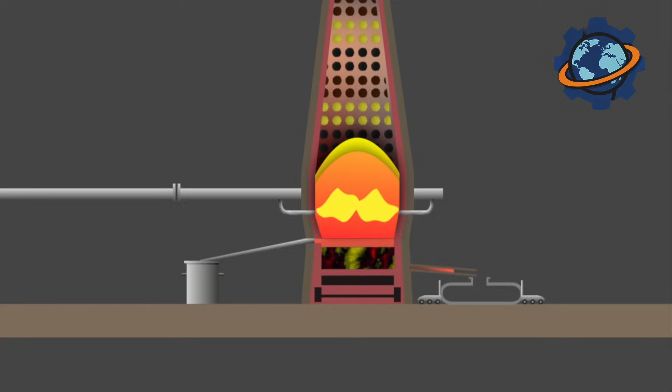The blast furnace slag, which we've already mentioned, becomes a valuable raw material for making cement, building blocks, and road aggregate after it's cooled and crushed. The blast furnace gas that comes out of the furnace isn't just released into the atmosphere. It's cleaned of dust and used as fuel to heat the very same air that's blasted back into the furnace. It's a closed-loop system that makes the process more economical.

Without a doubt, metallurgy is a serious challenge for the environment. However, modern technologies are constantly evolving. When blast furnaces are modernized, powerful filters and cleaning systems are installed to capture dust and harmful gases. Scientists and engineers around the world are working on creating green technologies, like using hydrogen instead of coke, to make metal production cleaner. But for now, the blast furnace remains the king of metallurgy. And every time you see a bridge, a skyscraper, or a train, remember these fiery giants and the people who tame rivers of fire to give the world a strong and reliable foundation.

For 75 years, from the late 19th century to the 1970s, the USA was the undisputed world leader in the production of pig iron, steel, and rolled products. During this period, the American iron and steel industry wasn't just a sector of the economy, it was the key or barometer of the American economy. In the 1920s, for example, the country produced about half of the world's pig iron. Imagine that. Every other ton of this strategic metal in the world was born right here in American furnaces.

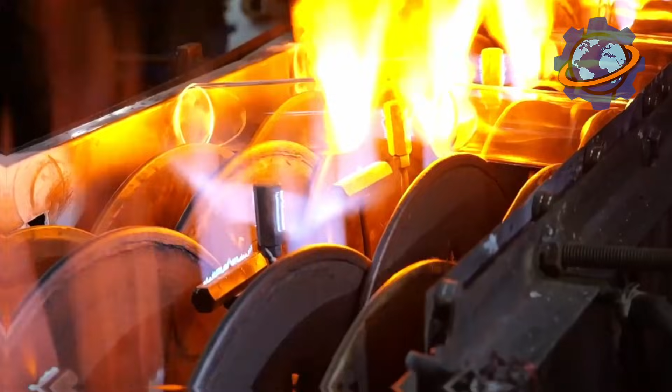Every year, the world produces over 130 million tons of glass. But few people know that behind every clear window, bottle, or skyscraper facade lies a true symphony of fire, air, and light. Imagine a river of molten sand flowing over a mirror of tin, giving birth to perfectly flat sheets of glass so smooth they can reflect the clouds. But there's another kind of glass, one that's alive, with a soul, created by the breath of a craftsman and the fire of a furnace. Stick around to the end, and you'll see how ordinary sand travels through a 3,000-degree journey to become the transparent marvel our world is made of.

While the vast majority of architectural glass today is born from a perfectly flat, fiery river flowing over molten tin in the float process, the true soul of the material is revealed in the methods that give it character and uniqueness. This journey from a simple, transparent sheet to a work of decorative art is a fascinating one.

To create glass with individuality that carries the mark of a human touch, craftsmen still turn to techniques that have existed for centuries. A glassblower dips his long, hollow pipe into a furnace where a mass of sand and other minerals boils at 2,000 degrees Fahrenheit. He gathers a honey-like ball of glowing glass on the end of the pipe and, skillfully rotating it, begins to blow air into it. The initial bubble, born from his breath, gradually transforms into an elongated, shining hollow cylinder.

Thanks to the force of gravity and skillful swinging, this cylinder can reach several feet in length. After the ends of the cylinder are cut off, it's sliced lengthwise and placed back in the furnace. There, under the heat, it slowly unrolls like a scroll, and the craftsmen smooth it into a flat sheet.

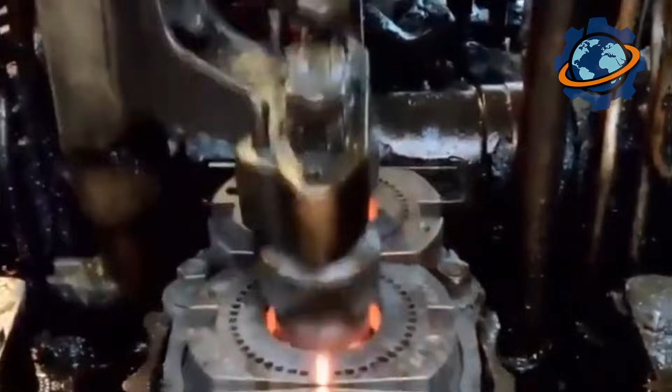Glass born this way is never perfectly flat. It's alive, retaining subtle waves, tiny air bubbles, and fine lines that tell the story of its fiery birth. This glass has a watery, organic quality that can't be replicated by a machine.

But the creation of unique glass doesn't stop at forming the sheet itself. Other methods transform ordinary sheets into complex decorative elements. Fusing allows artists to literally paint with glass. Different colored pieces of glass are arranged on a base sheet and sent into a kiln, where at 1,500 degrees Fahrenheit, they melt together into a single piece, creating bright, painting-like compositions.

Closely related is the process of slumping, or bending, where a flat sheet of glass is heated until it becomes soft and sags under its own weight, taking the shape of a ceramic or metal mold placed beneath it. This allows for the creation of curved panels and three-dimensional glass sculptures.

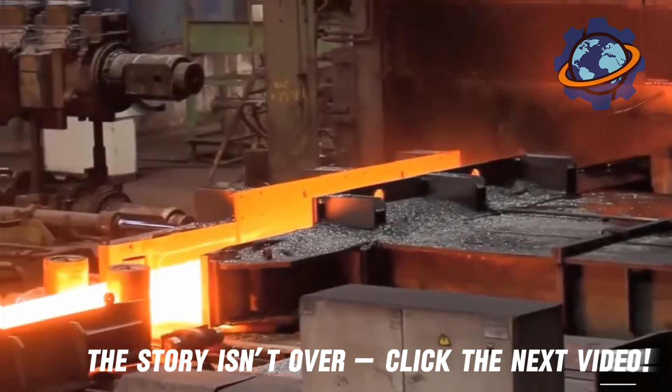Modern technologies add even more possibilities. Lamination allows for baking colored films, fabrics, or even thin sheets of metal between two layers of glass, creating endless variations of color and texture. Sandblasting and chemical etching remove the top layer of glass, making it matte and creating intricate patterns on its surface, from simple geometric shapes to photorealistic images.

In this way, by combining ancient crafts with cutting-edge technology, modern production transforms simple glass into an expressive architectural material capable of shaping light, color, and space. In today's world, where tons of used glass containers are collected daily, the journey from the recycling bin to a new bottle isn't just remelting. It's a high-tech odyssey driven by computers and light.

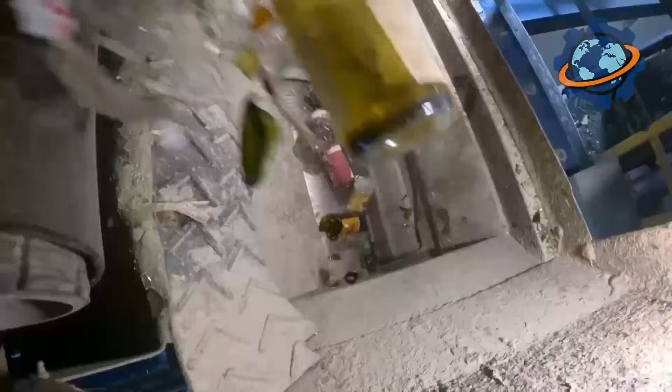Imagine a mountain of crushed glass, dozens of feet high, where clear, green, and brown shards are mixed with labels, caps, and ceramic contaminants. Turning this chaos into pure raw material is a job for a whole complex of smart machines. It all starts with mechanical crushing, where steel hammers turn bottles and jars into fragments a few inches in size.

This stream of glass, like a moving river, embarks on a journey through a labyrinth of sorting systems. First, powerful magnetic separators pull out any steel contaminants, and then eddy current systems literally shoot aluminum caps and foil into separate containers. Powerful blasts of air blow away light paper labels and plastic residue.

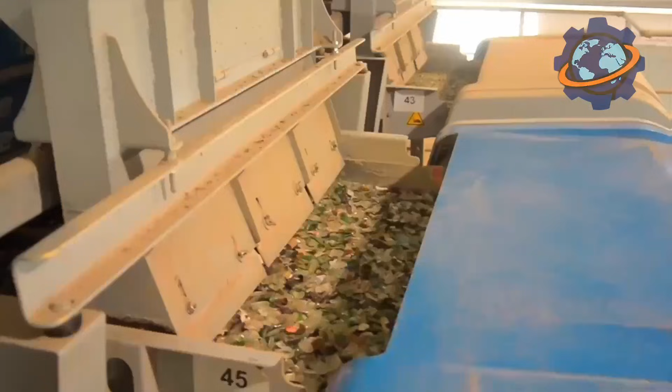But the hardest task is yet to come. Removing impurities that are almost identical to glass in weight and size, like pieces of ceramic, stone, or porcelain. These enemies of glass don't melt at standard temperatures and turn into defects in new products, so their removal is critically important. This is where optical sorting comes into play.

The glass fragments are accelerated on a conveyor belt to high speed and fly through a scanning zone. For a split second, each fragment is illuminated by a bright light, and high-speed cameras take hundreds of pictures. A computer system, with lightning speed, analyzes the images, identifying foreign bodies by their transparency, structure, and shape.

As soon as the system spots an opaque piece of ceramic, it instantly calculates its trajectory and commands a battery of air jets. A precise, sniper-like puff of compressed air knocks the unwanted element out of the mainstream, sending it to waste. This process is repeated thousands of times a minute.

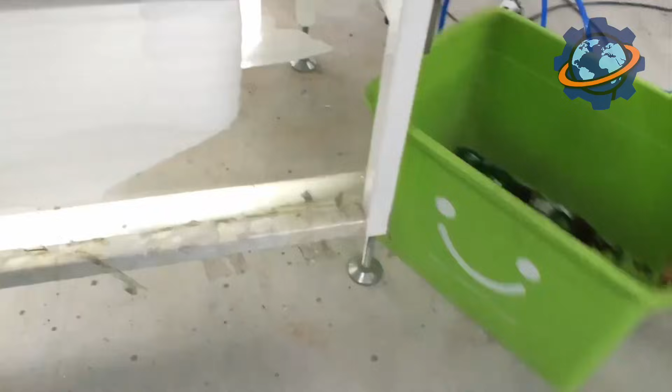At the same time, an equally important sorting by color takes place. The same optical systems analyze the spectrum of light passing through each fragment. The machine distinguishes between crystal clear, rich green, and deep brown glass. Depending on the set program, the system can, for example, select only clear glass, knocking out all colored fragments with air jets, or separate the stream into 3 distinct color fractions.

The result is a perfectly clean, color-sorted raw material. Cullet, ready for a new life without any loss of quality, which is the pinnacle of the modern circular economy. This raw material can then be used to make flat glass. The birth of modern flat glass is a symphony of fire and precision, a spectacular process that turns ordinary raw materials into perfectly transparent sheets.

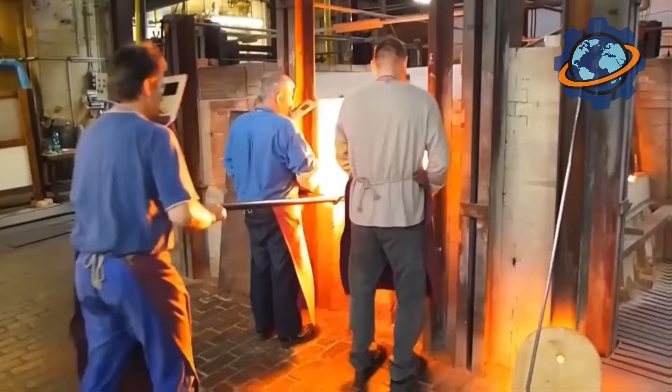It all begins in a massive melting furnace, the fiery heart of the plant that runs continuously for years. Into this furnace, which resembles a lake of molten fire, a carefully measured mix, or batch, is loaded, consisting of pure quartz sand, soda ash to lower the melting temperature, and limestone for stability.

A significant amount of cullet, or crushed recycled glass, is added to this to help speed up the melting process. Inside the furnace, at hellish temperatures approaching 3,000 degrees Fahrenheit, these solid components slowly transform into a uniform, viscous liquid.

The melting process is strictly controlled to ensure all particles are completely dissolved and gas bubbles are removed, creating a flawlessly pure melt. From the furnace, this stream of glowing orange molten glass, resembling a river of lava, flows smoothly into a bath of molten tin. This is the culmination of the process known as the float process.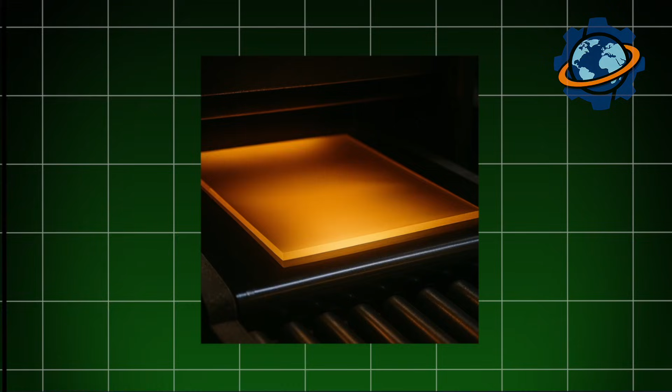The tin bath, stretching for hundreds of feet, has a perfectly smooth, mirror-like surface. Since glass is lighter than tin and doesn't mix with it, it spreads out over the surface, forming a perfectly flat ribbon of uniform thickness. Gravity levels it from the bottom, and surface tension smooths it from the top, creating impeccable optical quality. The speed at which this ribbon is pulled from the bath determines its final thickness with pinpoint accuracy.

After forming a perfectly flat surface, the glass ribbon, still very hot but now solid enough to hold its shape, enters the calmest but most critical stage, annealing. It enters a long tunnel known as an annealing lehr. If glass is cooled too quickly, its surface will contract faster than its interior, leading to massive internal stresses that will make it brittle and prone to shattering.

In the lehr, however, the glass temperature is slowly and controllably reduced over several hundred feet, from over 1,000 degrees down to room temperature. This process allows the entire sheet, both surface and core, to cool evenly, relieving all internal stresses. From the other end of the lehr emerges a single, flawless, continuous ribbon of perfectly transparent, stress-free glass, ready for automatic cutting into huge sheets that will become the windows, facades, and doors of our world.

Imagine a metal that's lighter than steel, stronger than aluminium, and can withstand temperatures at which other materials simply burn up. A metal used to build aircraft that conquer space and implants that serve people for a lifetime. Sounds like science fiction? But this is titanium, one of the most mysterious metals on Earth. It starts with tiny grains of ilmenite and rutile and ends up as parts for supersonic jets and spacecraft.

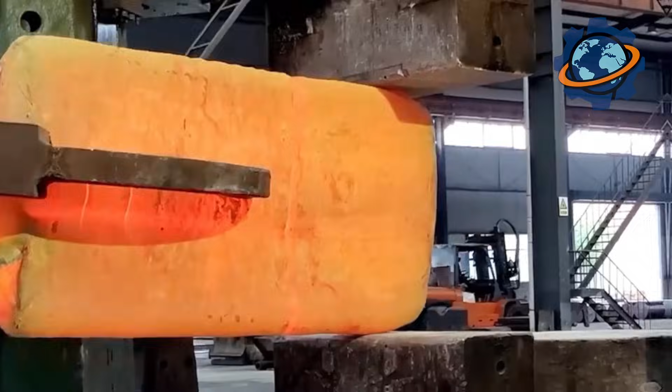But few people know that behind the gleam of titanium lies a manufacturing secret so dangerous and energy-intensive that it's rarely spoken of. If you watch till the end, you'll learn something that will forever change your perception of this metal.

The story of titanium production begins in the late 18th century when, in 1791, a British clergyman and amateur mineralogist named William Gregor discovered a new metal in the mineral ilmenite, which is now the main source of titanium. Initially, this metal was called menachanite, but later, in 1795, the German chemist Martin Klaproth rediscovered the element in the mineral rutile and named it titanium, in honor of the mythical Titans, giants of ancient Greek mythology.

However, the pure metal was first successfully isolated only in 1825 by the Swedish chemist Berzelius, though at that time it was contaminated with impurities and practically unsuitable for industrial use.

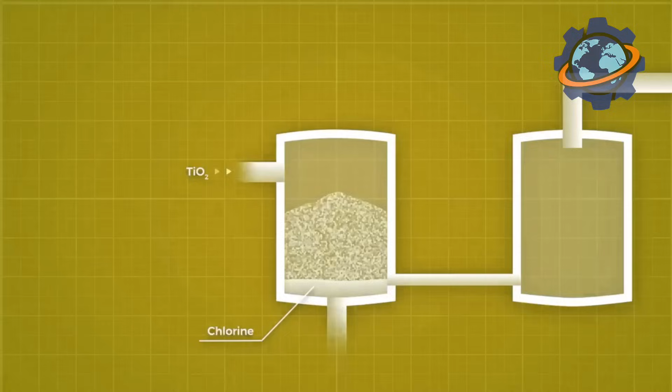The first attempts at industrial production of titanium began only in the 20th century. In 1910, the American chemist Matthew Hunter obtained a small amount of pure titanium, and the real breakthrough came in 1925 when Dutch scientists Van Arkel and de Boer developed a method for producing high-purity titanium, paving the way for its widespread application. From the mid-20th century, titanium production developed intensively, especially in the USA, where the metal became indispensable in aviation, the space industry, and military applications.

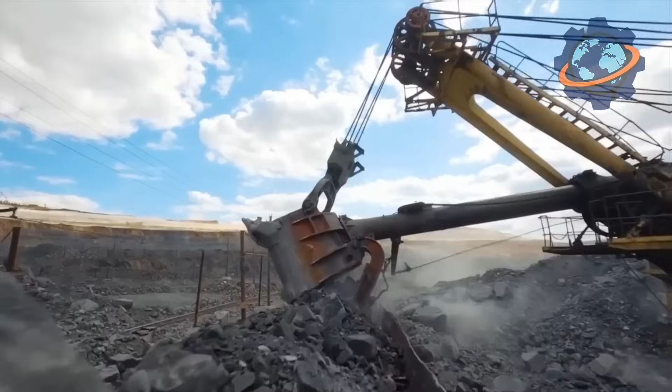The production of titanium starts with the mining of titanium-bearing raw materials, mainly the minerals ilmenite and rutile, which contain titanium oxides. These ores are found in placer or lode deposits and are widespread across the globe, particularly in Australia, Canada, China, Norway, and South Africa. After mining, the ore undergoes a complex multi-stage processing. First, it is enriched, separating the titanium minerals from the waste rock to obtain ilmenite or rutile concentrates.

Then, the concentrates are subjected to chlorination, which results in the formation of titanium tetrachloride, a volatile substance that is purified by distillation. This process allows for the removal of impurities and the production of a high-purity intermediate product. Next, the titanium tetrachloride is reduced with magnesium or sodium in special reactors at high temperatures in an inert atmosphere, producing titanium sponge, a porous metallic powder.

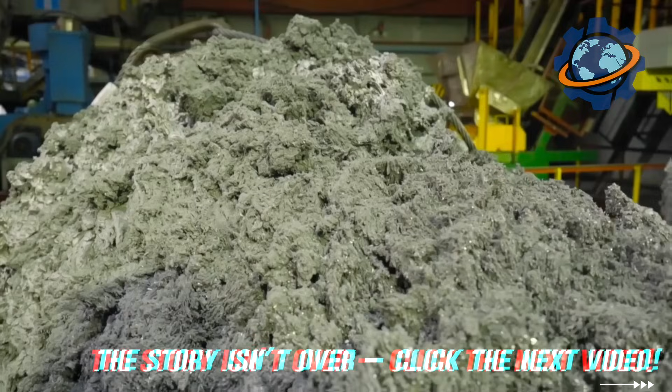This titanium sponge is then pressed, melted, and cast to obtain ingots or billets for further processing. The production of titanium is energy-intensive and expensive due to the complexity of the technological processes and the need to work in high-purity conditions.

The main industrial method for producing titanium is the Kroll process, which remains the global standard. It involves the chlorination of titanium ore, purification of titanium tetrachloride, and its reduction with a metal, allowing for the production of high-quality metal for aviation, space technology, medicine, and other industries.

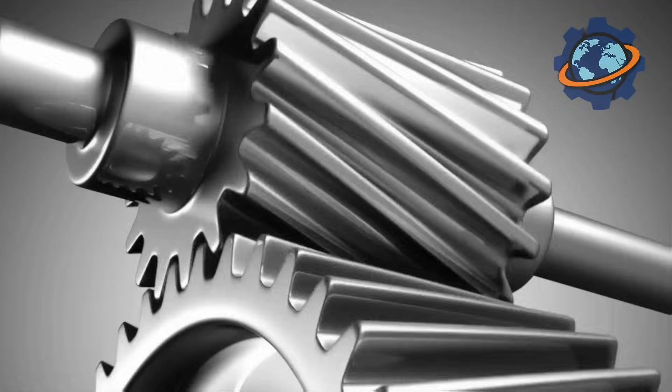Thus, titanium production begins with the mining of ilmenite and rutile, goes through complex chemical reactions and physical processing to transform natural minerals into a high-tech metal that combines lightness, strength, and corrosion resistance. The initial stages of titanium production are based on a complex, multi-step technological process that begins with the extraction and preparation of titanium-bearing raw materials, mainly ilmenite and rutile.

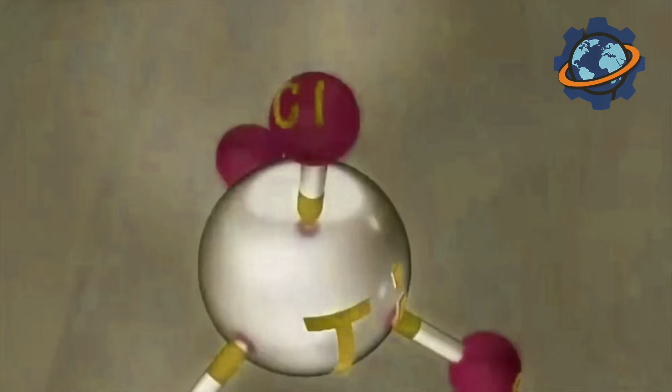These minerals contain titanium oxides, which must be converted into chemically pure titanium tetrachloride. To do this, the titanium ore concentrates are chlorinated in fluidized bed reactors at a temperature of 1,800 degrees Fahrenheit, where carbon and chlorine gas react with the raw material to form titanium tetrachloride and carbon monoxide. This tetrachloride contains impurities of other metals, which are removed by distillation to obtain high-purity technical titanium tetrachloride.

The next key stage is the reduction of titanium tetrachloride to metallic titanium. The most common industrial method is the Kroll process, in which titanium tetrachloride reacts with magnesium in a vacuum chamber at high temperature. The result is titanium sponge, a porous metallic powder containing impurities of magnesium and magnesium chlorides. This reaction mass is subjected to vacuum distillation to remove impurities, after which the titanium sponge is pressed and remelted into solid ingots or slabs.

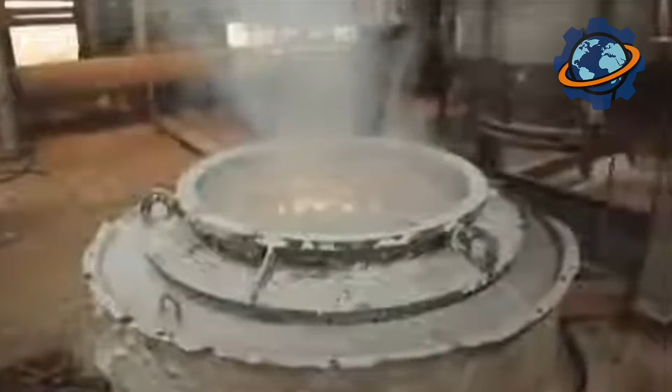The resulting titanium ingots are then used to produce alloys, rolled products, sheets, and complex parts. The entire process requires strict control of purity, temperature regimes, and safety, as titanium actively reacts with oxygen and nitrogen when heated. Just look at how incredible it is.

A porous, light, and seemingly fluffy mass of metal. This is titanium sponge. It looks nothing like a regular metal bar, but more like a piece of metallic sponge or foam, only made of titanium. But this fluffy material is the first step towards creating strong and reliable titanium ingots, which are then used in aviation, medicine, and other high-tech industries.

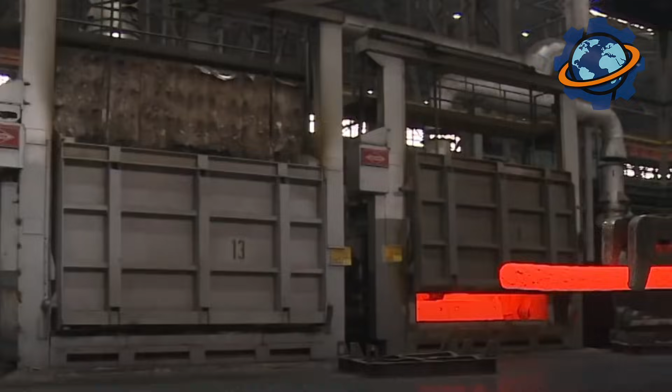First and foremost, titanium ingots can be used to create titanium alloys, mixtures of titanium with other metals that enhance its properties. To obtain an alloy, alloying elements are added to the molten titanium, most often aluminium, vanadium, molybdenum, iron, or niobium. These additives change the metal's structure, increasing its strength, heat resistance, corrosion resistance, and improving its workability.

The production of alloys usually takes place in vacuum arc furnaces, where the metal is melted at high temperatures in a protective atmosphere to avoid oxidation. To achieve a homogeneous composition, the alloy is remelted several times, after which it is cooled and prepared for further processing. The next stage is rolling.

Ingots or slabs of titanium and titanium alloys are heated to a certain temperature to make the metal more malleable and are passed through special rollers. Rolling allows for reducing the metal's thickness, giving it the desired shape and size, as well as improving its structure and mechanical properties. The result is various types of rolled products: strips, ribbons, wire, and bars. Rolling can be hot or cold, depending on the requirements for the final product.

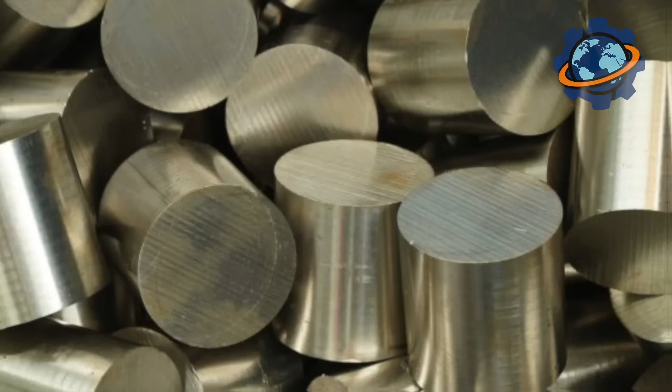From these rolled products, sheet metal is made: thin, flat blanks that are widely used in construction, aviation, medicine, and other industries. Titanium sheets are distinguished by their high strength and corrosion resistance, and are also easily subjected to further processing, cutting, bending, and stamping. The production of sheets requires precise control of thickness and surface quality, so after rolling, they are often subjected to additional processing, such as polishing or anodizing.

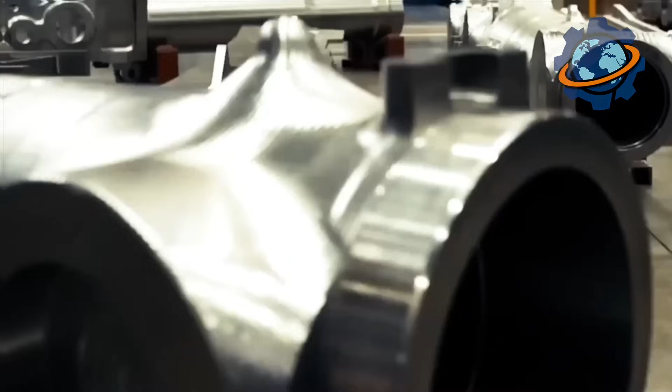To create complex parts, various methods of processing titanium and its alloys are used. These can include mechanical milling, turning, grinding, as well as modern technologies such as additive manufacturing using laser powder bed fusion. Additive technologies allow for the creation of parts with complex geometries that are impossible to produce with traditional methods. This is especially important for the aviation and medical industries, where lightweight, strong, and precise components are required.

Furthermore, to enhance their performance characteristics, titanium products can undergo heat treatment, annealing, quenching, or aging. These processes change the internal structure of the metal, improving its strength, hardness, and fatigue resistance. In aviation, titanium is used for 15% of the weight of a modern passenger aircraft, significantly reducing its overall weight and increasing fuel efficiency. In the medical field, about 70% of implants, such as artificial joints and dental prostheses, are made from titanium or its alloys due to their biocompatibility and durability.